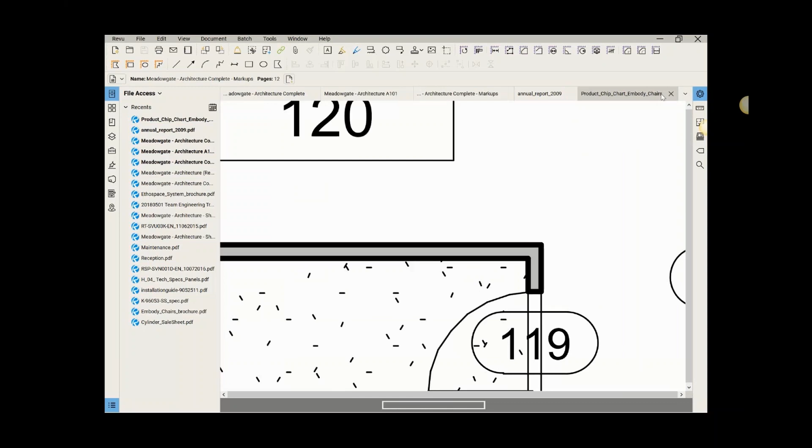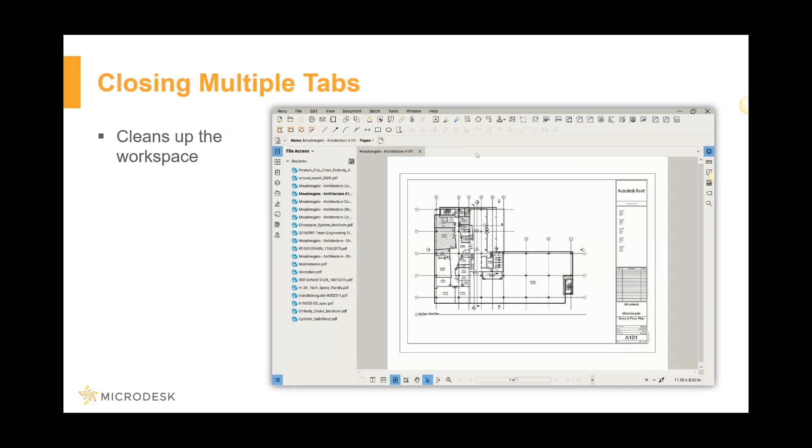Next, when working with many different PDF files, sometimes navigating the workspace can become cumbersome. Using the right mouse click on the tab you'd like to keep open, you can choose Close Other Tabs. This will close all the other files that are not active. You will be prompted to save the document if you haven't saved the changes in the documents that are being closed.

The data displayed in the markups list is highly customizable. Users have control over which columns are shown and in what order. They can create custom columns, including columns that perform user-defined calculations.

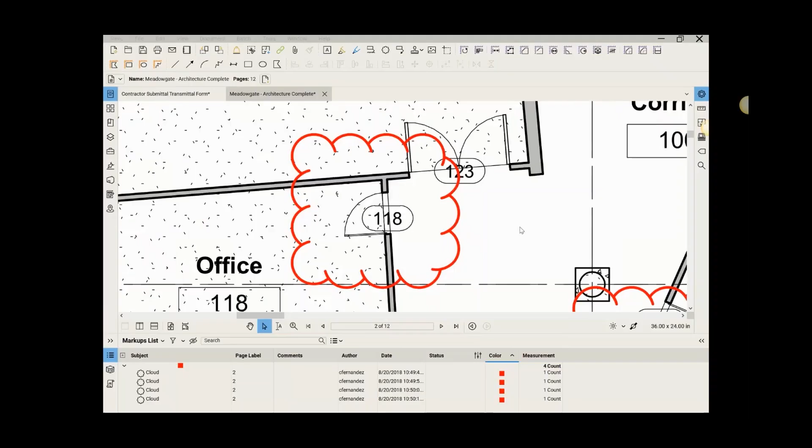In this tip, I'm creating a field for Project Manager sign-off for issues. Reviewing the list of standard markup fields, I see that it does not contain the field that I wish to use, so I'll choose Manage Columns. I'll select the Custom Columns tab and select Add.

I'll simply enter a name. For this one, it will be PM Sign-Off. And I'll also choose what data type I wish to use. In this instance, it's going to be a check mark.

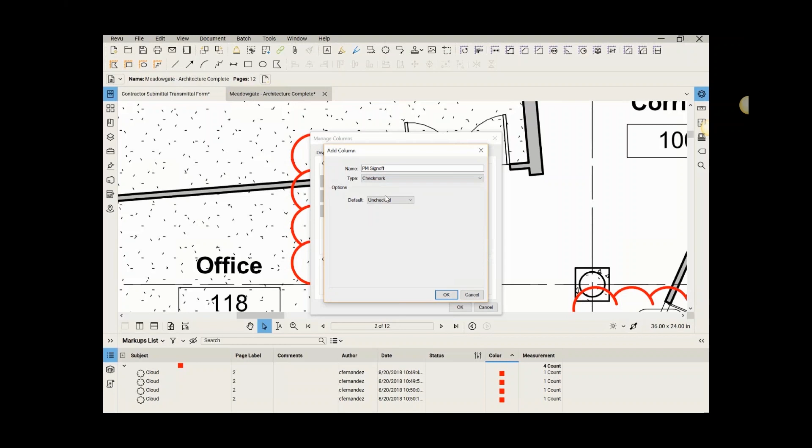On this screen, I can choose how I would like to order those or whether or not I want to keep it. Once I have created my custom column, it's now available to store values. This is a very powerful tool.

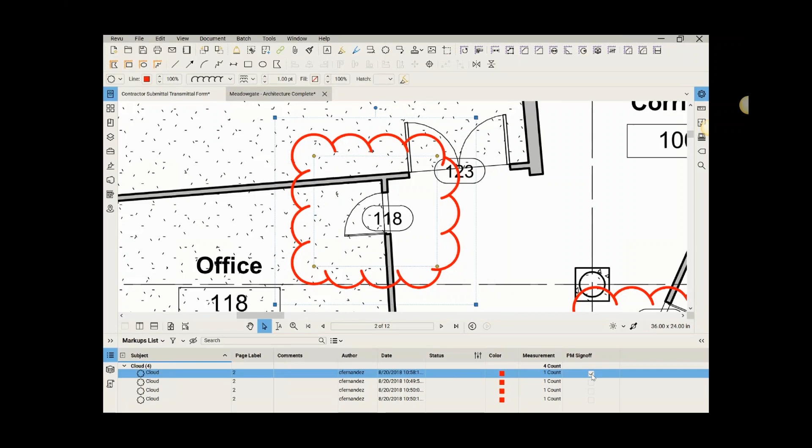Now, let's take a look at some document management tips. Our next three tips are not necessarily secret ones, but they are questions I receive fairly regularly, so I thought I would clarify them here. When should I use combine, split, and extract?

Use combine for multiple PDF files that already exist. Choose options such as whether to include the existing PDF's bookmarks and file attachments. PDFs are sorted in the order with which they're added. In this example, I created one 12-page PDF out of 12 individual files.

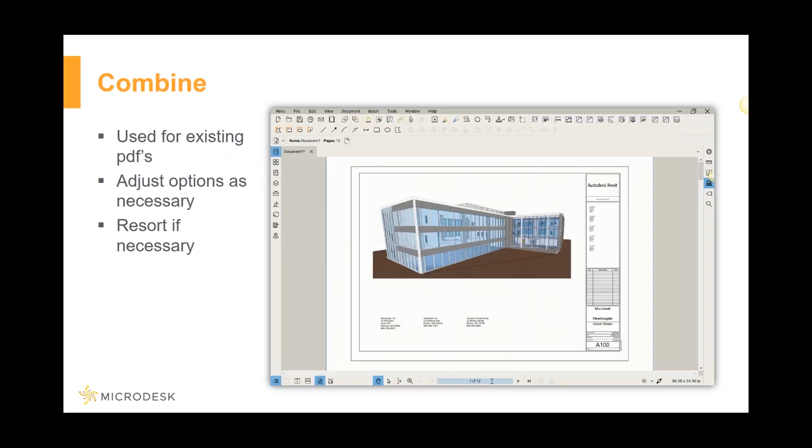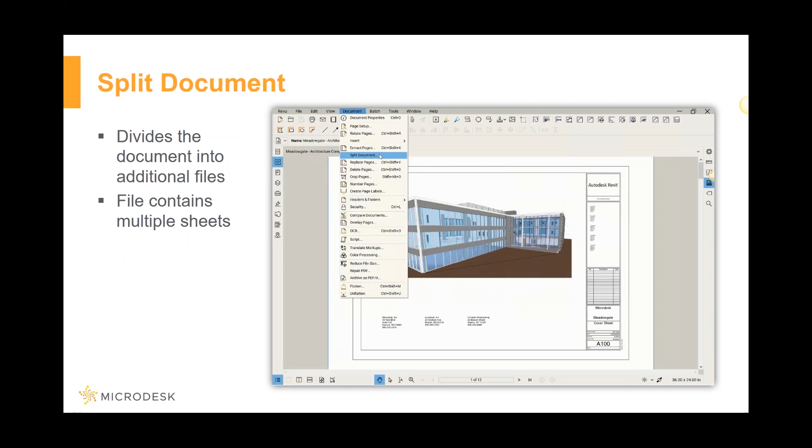The split document splits the file into separate files based on either page count, file size, or top-level bookmarks. The process creates new documents and does not change the original document. Extract pages creates a new document with the pages that you select. For example, a new PDF file can be created for sheets 1 through 6, or 4, 6, 9, and 12, as an example.

Settings exist to allow for hyperlinks in the document to be converted to relative paths. Choose a destination folder and how you'd like the document name. Once processed, you now have a document that contains only the pages you've selected. So here, for instance, I have a Part 1 and a Part 2 that contains only the pages that I chose.

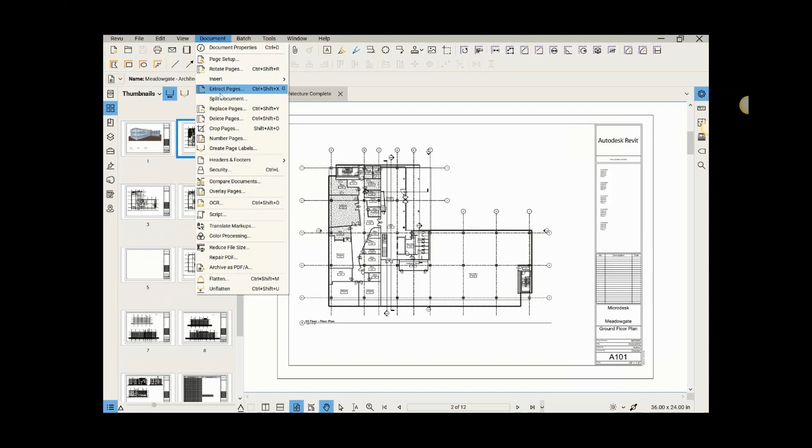Extract Pages selects individual pages or a range of pages in the current document and populates them into separate files. The process does not alter the current document. Once I extract those pages, it's going to create a new PDF file for each page chosen in the page range. For this example, I chose 2, 3, 4, and 6, and it creates a PDF for each one of those pages.

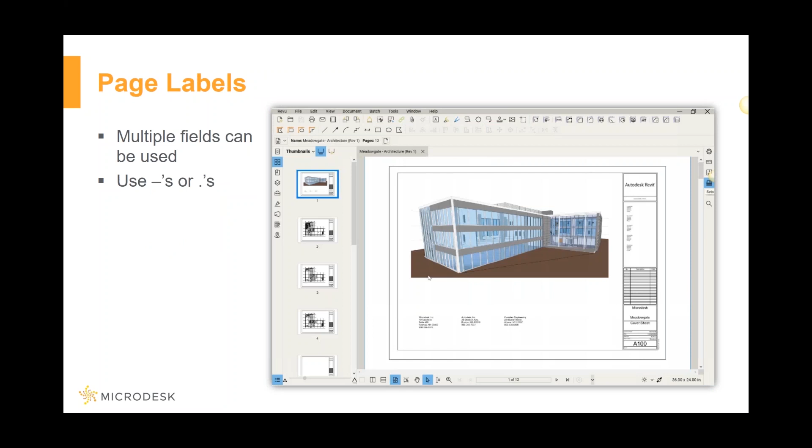Adding page labels is a critical tool in Bluebeam for organization. But did you know you can combine regions to create a more descriptive page label?

In this tip, you can see I'm going to select the page number and page name to create my page labels, placing a field around the number, adding some separator, for instance in this example a dash, and then choosing where the title is coming from.

Once I select OK, it's going to create the page labels for those pages. So you could use project numbers and page names, or you could use page numbers and plot stamp dates. As long as that information is in the document, it can be used.

Another tip that I often teach Bluebeam users is the use of sets. Sets allow users to open a collection of documents in a single view with the pages organized in a specified sort order, including any revisions and addenda. Users can navigate through these multiple files as though they were in one document without actually merging them into a single file.

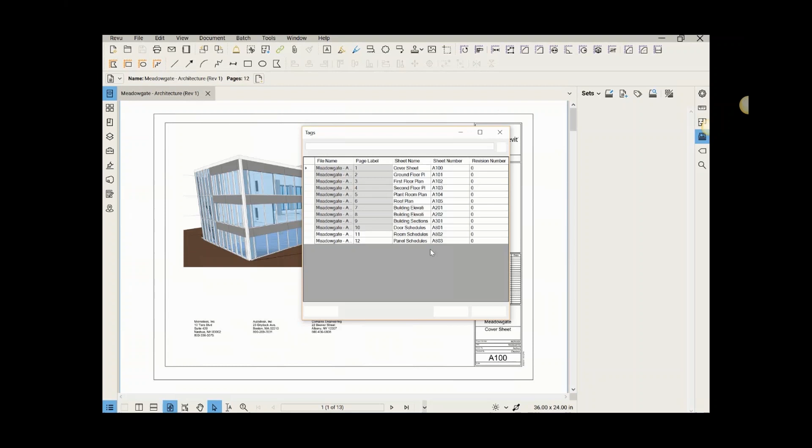All that is required is some simple defining tags. In this instance, it's going to be the page number. And once the set has been created, you'll notice that we now have the ability to open each one of those sheets and start marking things up.

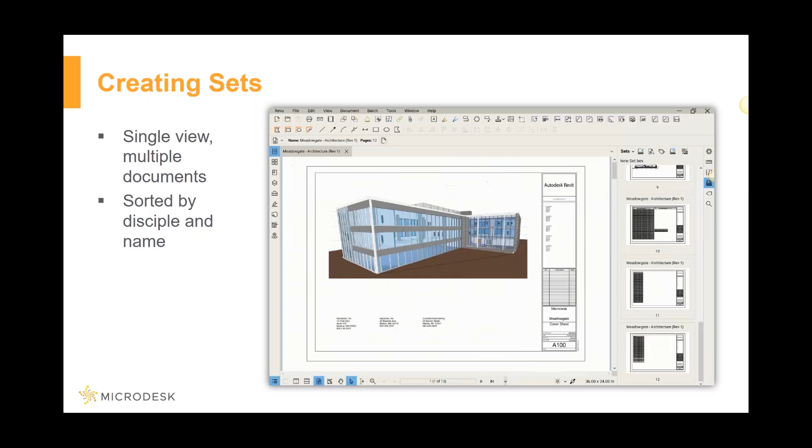The Layers panel provides quick access to layers, layer configurations, and tools for creating and deleting layers. Using layers to organize markups is a huge tip. Here, I have created a layer for interiors.

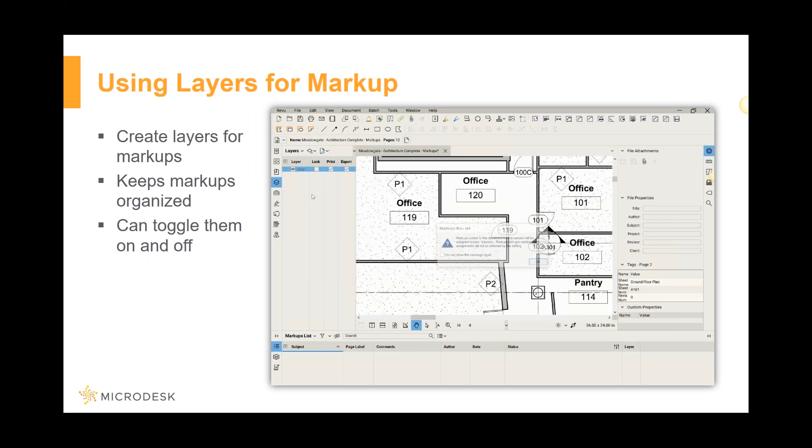Once created, I'm going to right mouse click on that layer and choose Markup Layer. All new markups will be added to this layer, and the alert is letting me know that the markups will be added to that layer. Here, notice I have a door that needs to be flipped.

So what I'll do is I'll simply add my cloud. In the markup list, I will edit my comments, and you will also see that the layer is set to interiors.

These layers can be toggled on and off for visibility purposes. This will help your markups stay organized and make it easier to navigate your document.

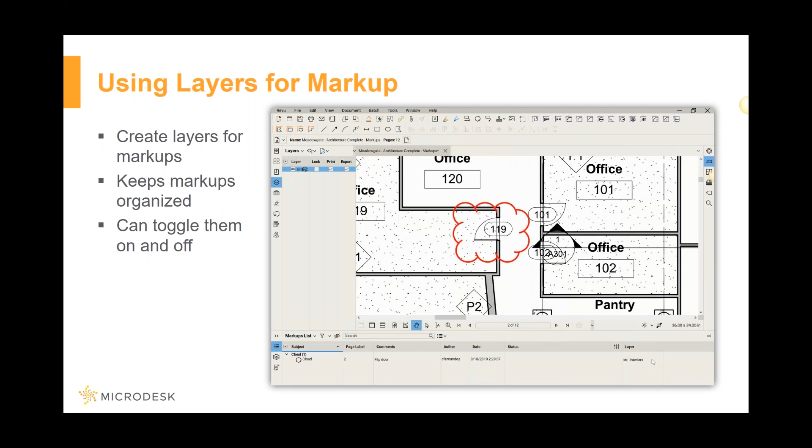Forms can be created in Revu by manually placing form fields on a PDF or by using the Auto Create function. Auto Create is the better option for PDFs that already represent forms, as it will detect areas of the PDF that conform to the form field characteristics and build a form automatically for you.

This PDF has areas that I would like to have converted to form fields. Using the Tools and Form pull-down, I've selected Automatically Generate Form Fields. Bluebeam scans the form and adds fields at all of the form areas. Once the document is saved, it's ready to be used as a form. This tip will make form creation much faster.

Now let's take a look at some editing tips.

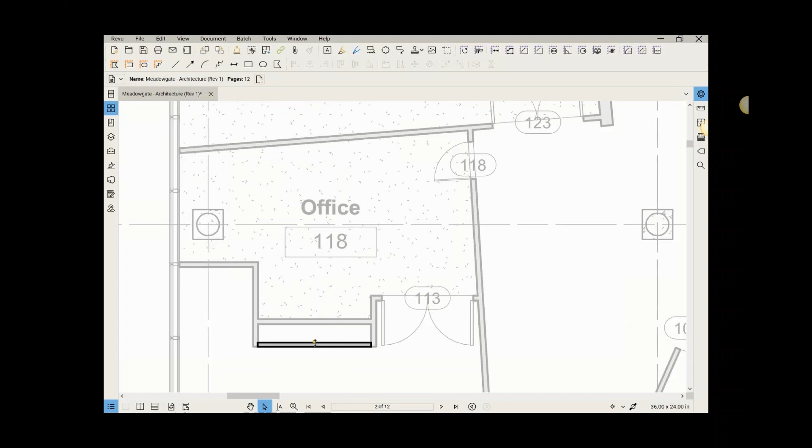Using the dimmer turns down or dims the content layer of a PDF so as to better see annotations. This tip allows you to see items that you might be using to make design decisions in Bluebeam. In this example, it may be difficult to pick up the wall cavity that was added, but using the dimmer tool, it's easy to see. This is a very useful tip.

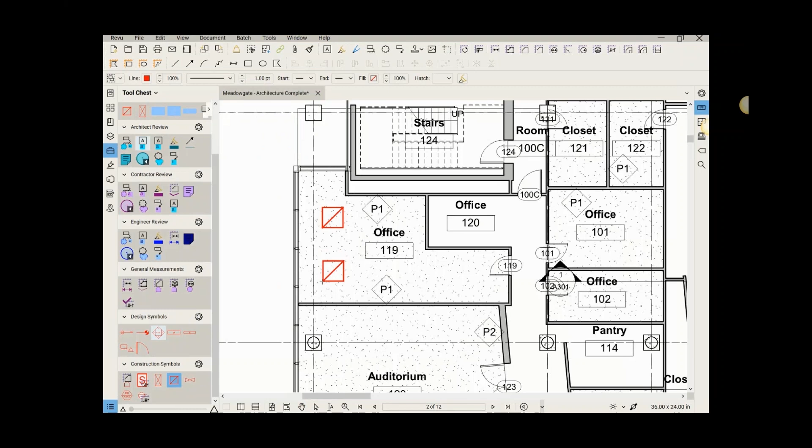Don't forget about the reuse tool. When the reuse tool is enabled after placing a markup, the same markup can be added to the PDF without having to reselect it. This mode is helpful when adding the same markup onto the PDF sequentially. Reuse can be found on the Tools menu, and in this video, I'm placing return grills in the space using the Reuse tool. This tip makes my work a lot easier.

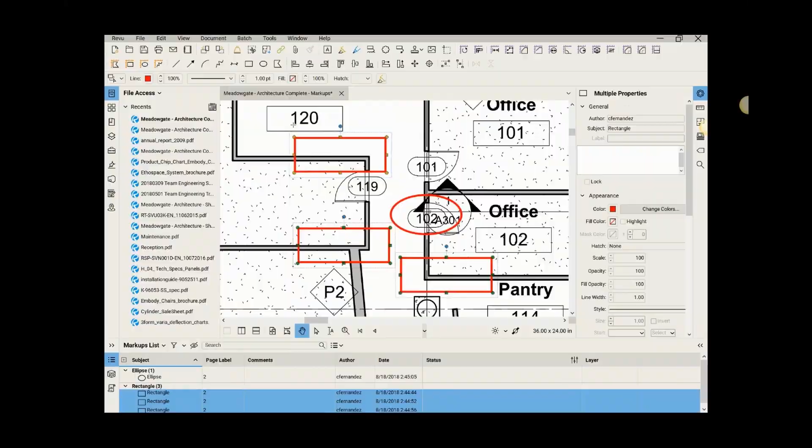There are several ways to select more than one markup. A neat trick is using the lasso selection method. In this example, I would like to select the 3 rectangles, but not the oval. Choosing Edit and Lasso, I can create a selection lasso to pick up exactly what I want. From there, I can manipulate what I need to. Shift and the letter O invokes the command as a keyboard shortcut.

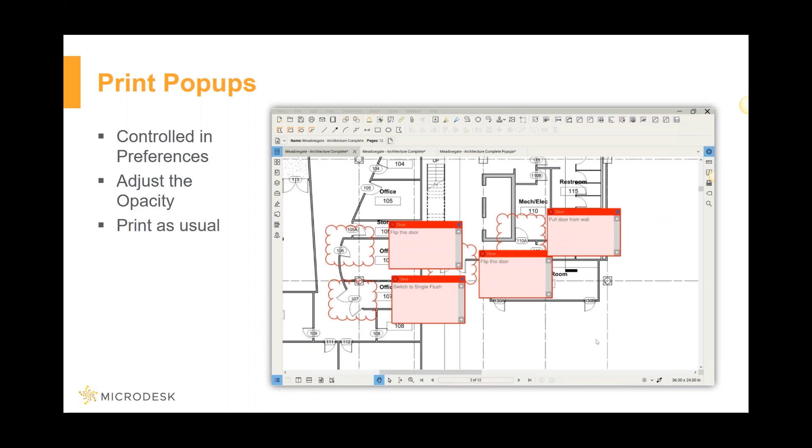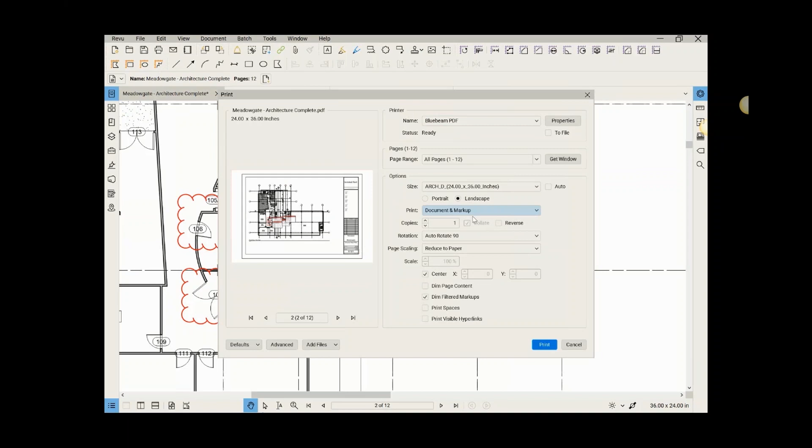I'm often asked if I could print out the pop-ups that are on screen without doing a screen capture, and the answer is yes. You'll notice here I've printed, and I only get the revision clouds. By changing a setting in your preferences, we can print the pop-ups. Select the tools and markups from your preferences, and check the box for print pop-ups. You can also control the opacity of the printed boxes. Here I chose 70%. Next, select my printing properties, and they now print.

Existing tools in the tool chest are very useful, but sometimes we need something similar but different. In this example, I'd like to check my common path of travel distance for my life safety plans. In the general measurement section, there's a poly length measurement tool. This should do the trick, except it labels the path piping, duct, and conduit.

Since I use this tool all the time, I'd like to edit it so that it reads path of travel, and I also would like it to be red. I will start by duplicating the existing tool. Now, once I invoke the tool, I can then change colors, line types, and line weights.

I'm going to go ahead and test that tool again. Looks pretty good.

Next, I want to address the label that still reads the piping, duct, and conduit. I will switch the tool chest view to detail and edit the label to get the verbiage that I'm looking for.

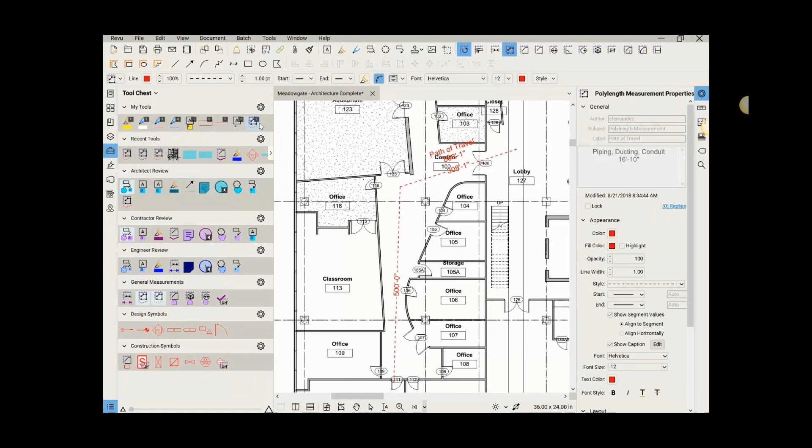Most people know about flattening an entire document. We do that task from the Document menu. But we can accomplish a single flatten by selecting the object and right mouse clicking.

Here, I'd like to get rid of this rev and form number. I will use the rectangle tool without a border to cover the information. Then, right mouse click to flatten the object to the document. You can see that the object has now been flattened.

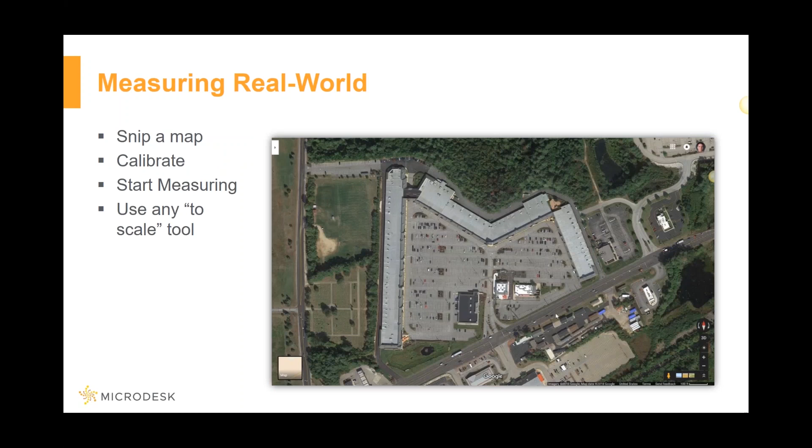The next tip involves using real-world elements outside of Bluebeam to do some preliminary design work. In this example, I have a mall complex that we've been asked to create an addition to. The building in the center left would like to add to their existing structure. Here, I'm going to use a snipping tool to get a map from the internet. Take me just a second.

Jumping back into Bluebeam, I'm going to start a new document. I can choose a template, or I could choose a size and an orientation. From there, I'll simply insert the image into my new document. Using the Calibrate tool on the Measurements tab, I'm going to set my desired width of a known area.

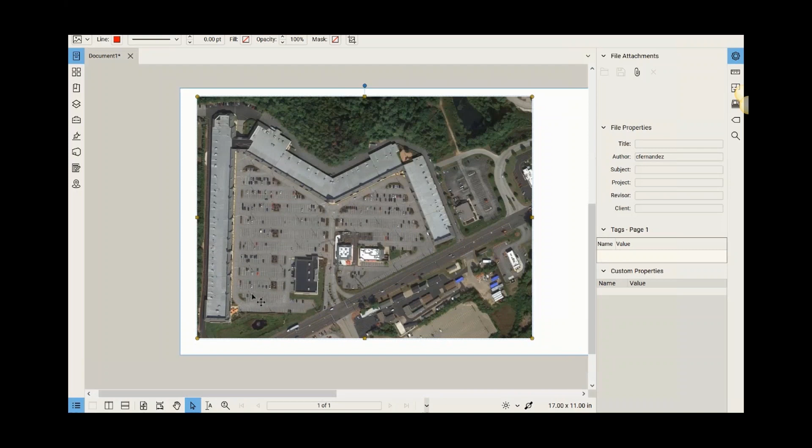From there, I can use any of my To Scale tools to sketch the desired shape to real-world sizes.

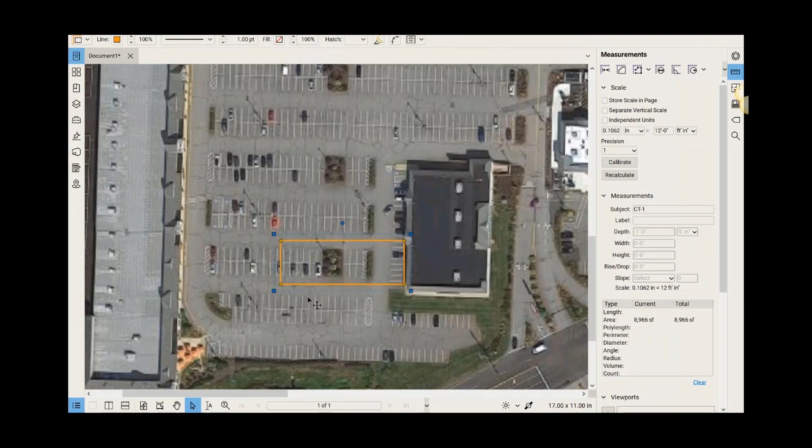This next tip is the use of the Snapshot tool. The Snapshot tool copies text and raster or vector content to the clipboard. When a snapshot is pasted in a PDF with Revu, vectors will remain editable. When pasted into an external application, a raster image will be pasted. Here, I will select the Snapshot tool and create a window.

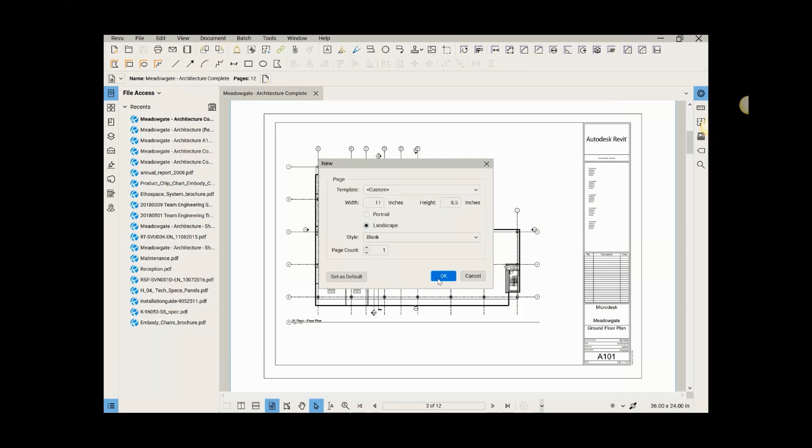This portion of the document has now been added to the clipboard. From there, I will create a new document to place the snapshot into. I can use a template, or I could specify a size and an orientation. Then a simple Control-V to paste the snapshot into the new document.

Did you know that you could use this outside of Bluebeam? The copied object in Snapshot can be used in many programs such as Word or Outlook. And as of around lunchtime today, we tested this and it went right into AutoCAD without any issues.

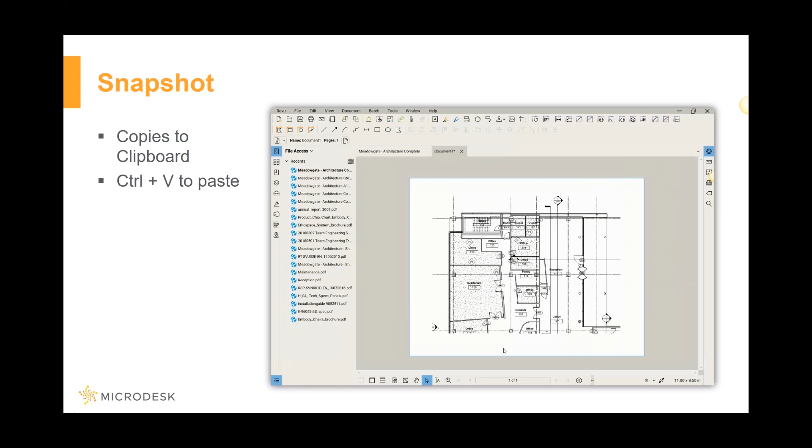Now, let's take a look at some administrative tips. Bluebeam makes it possible to maintain revision history, making it possible to revert back to previously saved versions of a PDF. Revision history is stored within the PDF, resulting in larger file sizes. This tip will save you time trying to locate revisions of a document.

To make this setting, it's really simple. Select the Revu menu and Preferences. Select the General and Document tab and change the Save mode to Maintain Revisions. Once the setting has been changed, you may now use the Revert tool to go to previous revisions.

This was one of the top feature requests from customers for this release. You can remap any of the tools or commands to any specific keyboard entry you desire. If you're looking to work more efficiently, keyboard shortcuts are a way to cut down on time spent scrolling and clicking. Another additional feature to this tool is the mappings can be exported and imported to help with a company standard or for use of Bluebeam on multiple computers. The mapping tool is located at the Revu menu and keyboard shortcuts.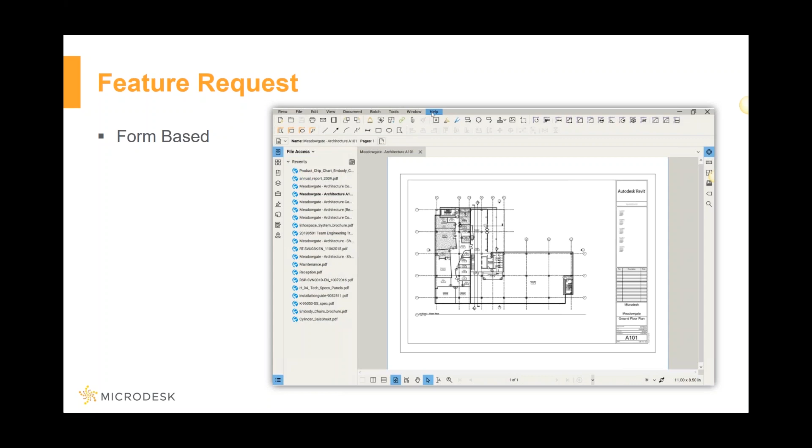And speaking of feature requests, our final tip, if you have a feature request, submit it. Bluebeam is always looking for user input to improve the product. Simply navigate to Help and make a suggestion. Fill out the form and submit it. Maybe your idea can make it into the future release of Bluebeam.